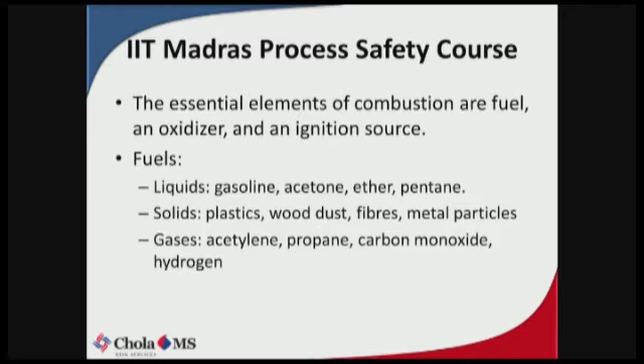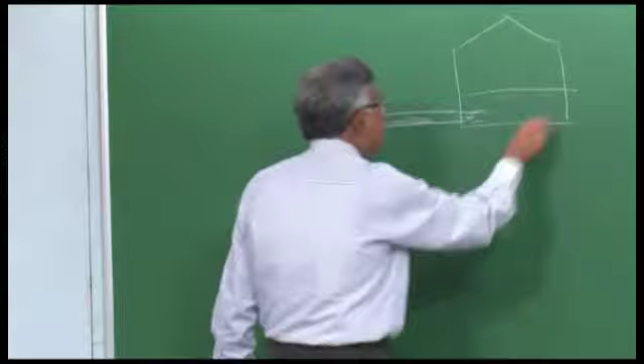So there is a cardinal rule that whenever we are trying to take any petroleum liquid inside a tank which is empty to begin with, I must not allow the velocity of the liquid to be more than 1 meter per second. Once the liquid level has built up to some extent, whatever static electricity is there will get dissipated within the liquid level. There is no oxygen there, so there is no problem. So while the tank is empty, you cannot have a very high velocity. The most dangerous product is the fuel used for driving aeroplanes, aviation turbine fuel or kerosene. That is the most dangerous fuel which can lead to this kind of hazard.

So there are such things, there are lots of do's and don'ts which come out of it. So that is static electricity. Yeah, you were saying something? Yeah, heat.

How does heat become an ignition source? So far what I told you may not be clear, but it will be clear when I go a little further. But let me tell you only so much: when there is an atmosphere with some flammable gas like propane, butane or whatever flammable gas, and there are hot surfaces nearby, then there is a possibility that the hot surface will become the ignition source for the gas.

Am I putting all of you to sleep? No? Sure? Okay. Hot surfaces will become an ignition source. Why does it happen? We will see.

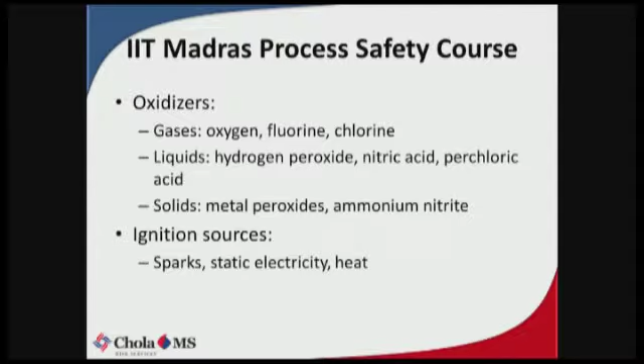Now we will go to some simple definitions so that the concepts are clear. Let us not confuse things, we will go for definitions. It is always nice to have definitions, somebody explains a difficult concept with a simple definition, it registers better. With that objective, now, combustion and fire, what is combustion and fire, how do you define it?

It says combustion is a chemical reaction in which a substance combines with an oxidant and releases energy. We have talked about this so far: oxygen, that is the oxidant or oxidizing agent, fuel, and a source of ignition. Three things are required for a fire.

And when a fire happens, what is that fire? Let us try to define it. What is fire? Fire is nothing but a chemical reaction. This chemical reaction takes place in something called a flame, in which this combination of oxygen, fuel, and the spark occurs. The spark initially results in a flame. All that happens in a chemical reaction.

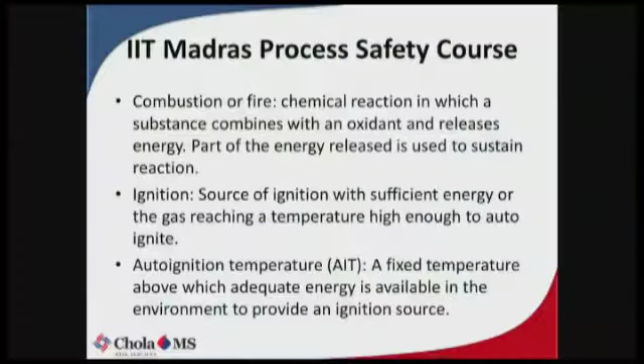Let's move further on. Have you heard of flashpoint? You have heard of flashpoint, all of you? So what is a flashpoint? It's a temperature at which a fuel catches fire, for an instant, like 4 seconds, for a very small instant - that is a flashpoint. So let's give it a proper definition: flashpoint is the lowest temperature at which a liquid gives off enough vapor to form an ignitable mixture with air.

As inadequate vapor is produced to maintain combustion, vapor will burn only briefly. That means it is the lowest temperature at which a flammable liquid will give just enough vapor in the presence of an ignition source so it will just ignite, and because that little ignition has not produced too much exothermic heat of reaction, it cannot generate more vapor which can again catch fire. Because that has not happened, the flame got extinguished.

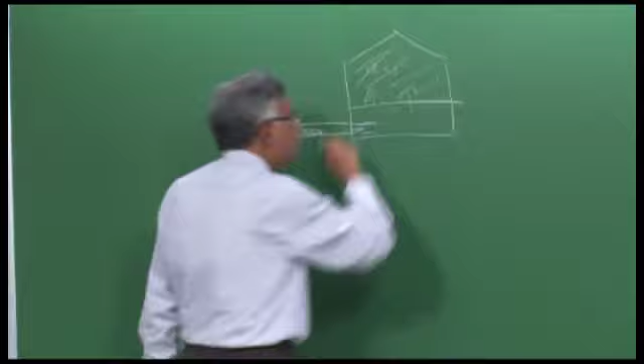So these rules say that products like petrol, diesel, and kerosene should not be stored in this type of tank, called a cone roof tank, because the liquid level is here and there is a vapor and air mixture above it. They should not be stored that way; they have to be stored in some other type of tank.

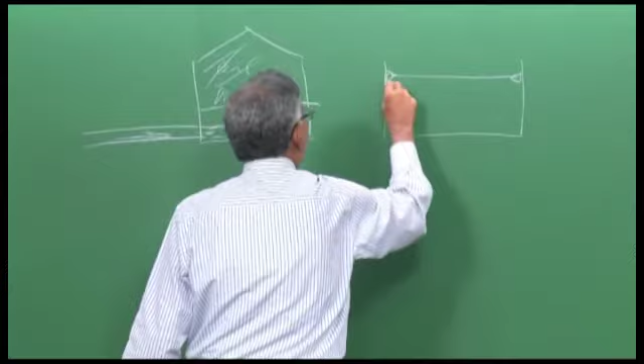Just be familiar with the term floating roof tanks. A floating roof tank is something like this: you have a tank, the liquid is all here, and as the liquid level goes up and down, the roof also moves up and down. This is called the floating roof, and there are seals here so that vapors cannot escape through the sides. These floating roof tanks have eliminated the vapor space.

So these three products—petrol, diesel, kerosene—are always stored in floating roof tanks, including crude oil, since crude oil also contains light volatile material. What is stored in cone roof tanks? Heavy products which are not volatile, like fuel oil. Fuel oil is not volatile, it's a thick material—it doesn't give out vapor when stored.

So these rules that I quoted, the Petroleum Rules, specify that if a product has a flash point below, I think, 45 degrees centigrade, it should be stored in one type of tank, and if above, in another type. All this is very clearly mentioned.

So in India, if you want approval to put up such tanks, they will check whether you have selected the right type of tank for storing that product. Unless they put the stamp, you cannot proceed. The body responsible for this is the Chief Controller of Explosives—a very powerful body. You take your drawing to them showing the tanks you are putting up, and unless they stamp that drawing, you cannot go ahead and start fabricating.

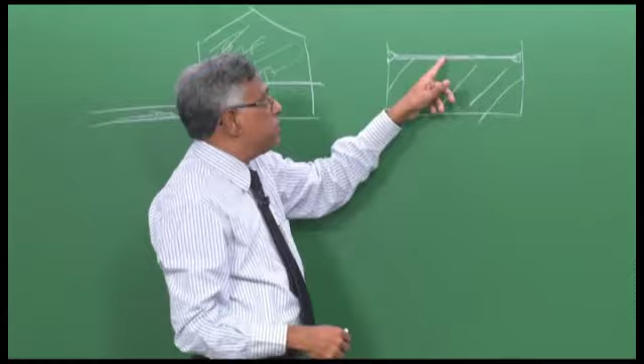Since this floating plate moves up and down with the level of the liquid, there is no space between the top of the liquid level and the bottom of the plate—no space at all. So the vapor space is eliminated.

Have I answered your question? Can't we have a vent with exhaust in that? A vent with an exhaust, and put an exhaust fan here to take the vapor out. Is that what you are saying? Yeah, you can have that, but what are you trying to do by that?

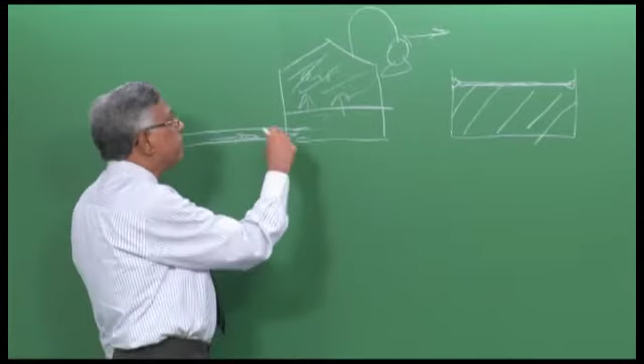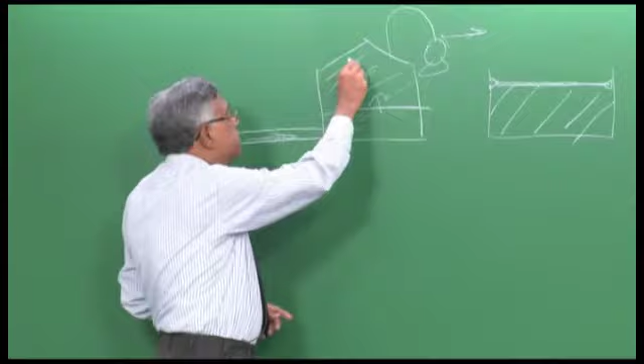Trying to remove the air and vapor mixture. Yeah, but at any given point of time, vapor is getting generated. You are removing it, but it is still there. But then what will happen is, if you try to take this vapor out at a much higher rate than it is getting generated, this space will go under vacuum. And what happens when an enclosed container goes under vacuum? It will implode, it will collapse. So you cannot put these things under vacuum.

So that is the importance of flashpoint. So now whenever you are in an industry where you are in charge of a group dealing with storing petroleum products - because all these are petroleum products, like petrochemical plants, fertilizer plants, every type of plant - these are all petroleum products, naphtha, and you are in charge of the design, you will remember this class. We talked about flashpoint. Flashpoint will come back again and again.

5 more minutes. Next is fire point. What is fire point? Different from flash point - in flash point what happens? We heat it so slowly, provide the heat so slowly that very little vapor comes out, the lowest temperature at which it just catches fire, but the flame cannot be sustained. But suppose we start putting enough heat in that material, in that oil, what will happen? The flame will sustain, and the whole thing will catch fire.

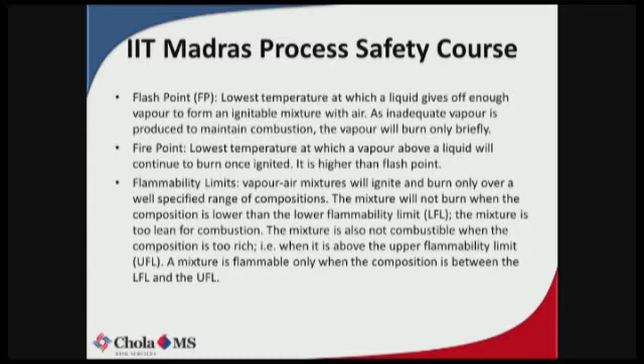It only means that, suppose I have a mixture of methane and air - it is a flammable mixture because there is air, there is fuel, when there is a spark, it will burn. But what it says is that it may not happen always. Why? When will it not happen? For the mixture to be flammable, it is necessary that the methane air mixture must have a minimum methane content, and it must also have a maximum methane content. It will be flammable only in this range. If it is lower than the lower methane content, even if we bring a spark, it will not burn. If it is higher than the highest methane content, then also it will not burn. That's simply what it means.

Now I will give you an example to drive home this point. You have seen petrol pumps, right? You have got the dispensing pump - from where does the petrol come? The tanker is outside, but the pump is underground. So underground there are tanks. Suppose there is a petrol pump, this is the dispenser, then there are tanks here underground in which there is petrol. And there is a pump here, and the pump will take suction from here and go into your car. And when the level comes down, you have to bring a tanker and fill petrol here.

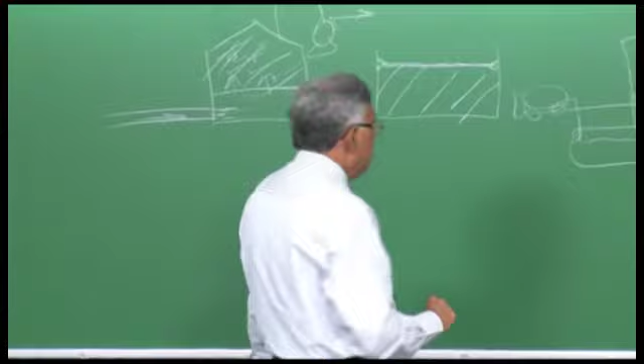Now in this tank, if I take a source of ignition, like if I make an electric spark over here, will it catch fire? Will the tank catch fire?

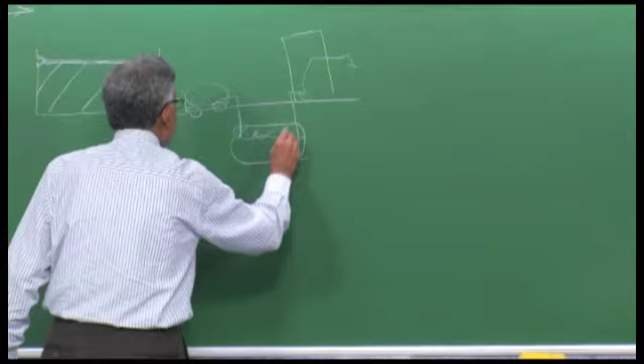Depends on flash point. For petrol, the flash point is something like minus 10 or minus 20 degrees centigrade, above the upper flammability limit, the UFL. Is it oxidized? Well, this vapor space is nothing but air and petrol vapor mixture, so air is there.

But will it catch fire? It may be above the upper flammability limit because the concentration is very high. Maybe above the upper flammability limit. Anybody else? Since the tank is full of petrol, there is more chance of getting into the upper flammable limit.

No, let's talk about what is there. There is petrol, and I have put a spark plug there which is sparking. Will it catch fire? Why?

Because sir, that triangle is getting completed. Fuel is there, petrol is there, oxygen is also there, and we are giving that spark, which is playing the role of ignition, sir. So according to this, it will catch fire - that vapor air mixture above the liquid inside the tank will catch fire. Right? That's what you are saying.

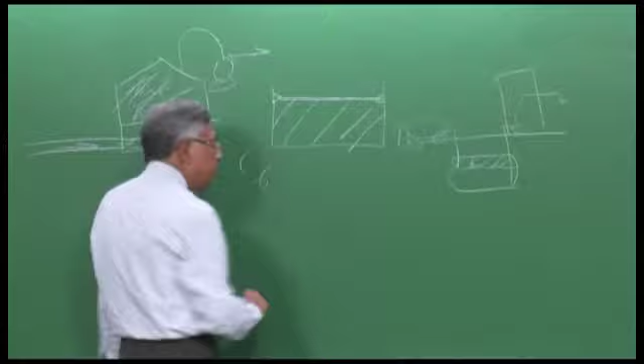Okay, now, let's take petrol as a complex mixture of hydrocarbons from C4 to C6, C7. Let's take it as something like C6 on average, assume. The C6 vapor air mixture is flammable, usually not only C6 but most hydrocarbons, in the region of, let's say, 5% to 10%. I may not be very accurate on these figures, but example, I am giving illustratively 5% to 10%.

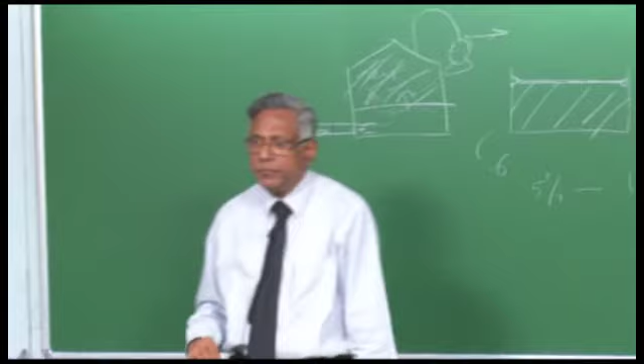So if this petrol vapor and air mixture is such that the petrol component is between 5% and 10%, it is a flammable mixture. If it is below 5% or above 10%, it is not flammable, which means that although oxygen is there, although fuel is there, although spark is there, it will not catch fire.

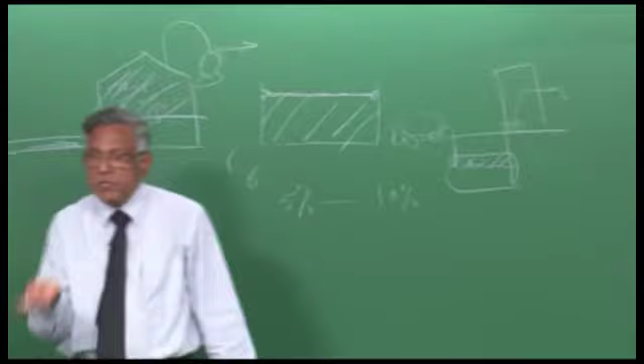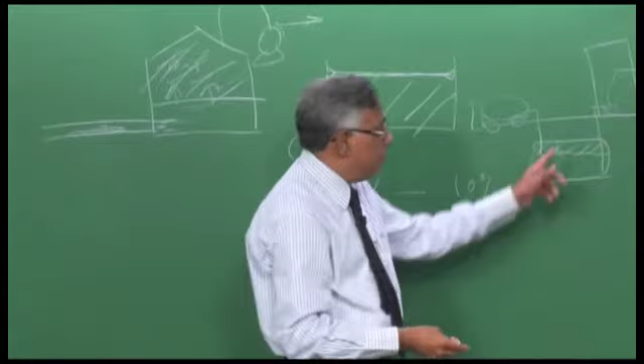What is happening here? The petrol is exerting a vapor pressure in an enclosed vessel, right? And the vapor pressure is such that the petrol content in this vapor space is much, much higher than 10%. So it is a rich mixture - a rich mixture of petrol and air. So when it is a rich mixture of petrol and air, that mixture is not flammable. So it never catches fire.

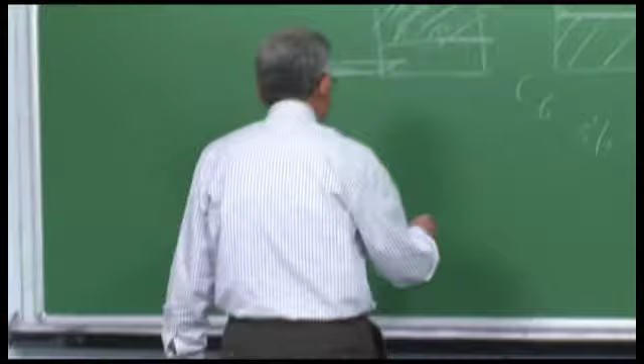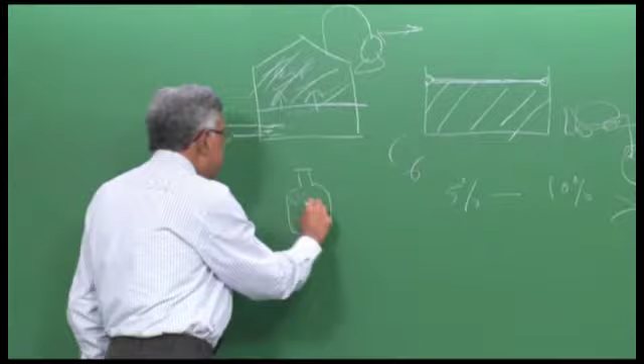But if you take petrol from a bottle - there is petrol here - and leave it open in a room. I wish I had a video to show you, but I don't have that video. So the bottle is there and I am lighting a match here. The whole thing will catch fire - it will be a flashback.

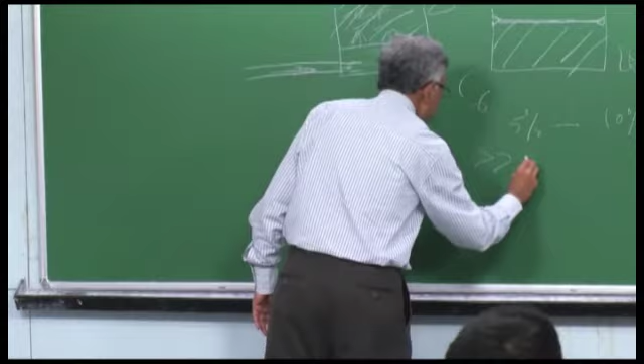Because the petrol is very volatile, right? The petrol which evaporates from there fills up the room. The petrol air mixture in the room is much less than 5%. When you have more, nothing will happen. If much less than 5%, you will only get some smell - nothing will happen. But if you take this petrol and pour it on the floor

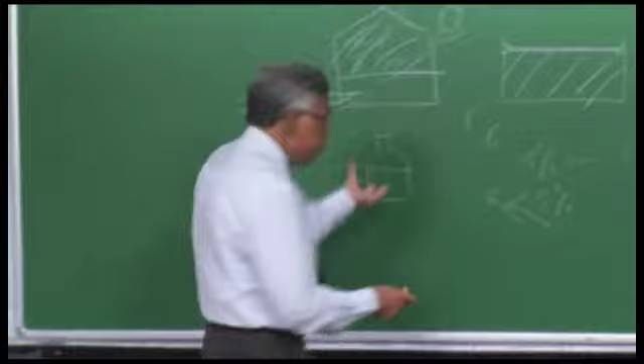and just take a spark nearby, the whole thing will catch fire - a pool fire. Because that time the percentage of petrol in the air has crossed 5%. Again, these are all illustrative numbers, okay? It will immediately catch fire. So things like petrol, hexane, acetone, if you put it on the floor and try to put a match there, you will find it immediately catches fire.

So that happens because the concentration of petrol goes into the flammable range - it goes beyond 5%, above the flammable lower limit. If it is outside the flammable range, like you keep it in a bottle and just leave the bottle open, nothing will come. But if you pour it on the floor and try to light it, it will catch fire. But in a petrol pump, in a tank like that, it will not catch fire. So this is the most important thing about flammability limit. We will talk more about flammability limit again tomorrow when we meet.